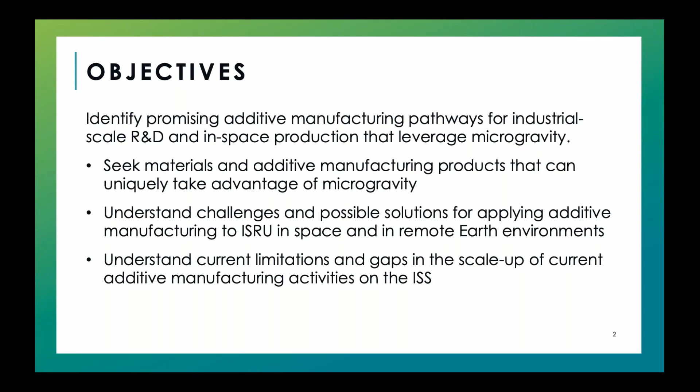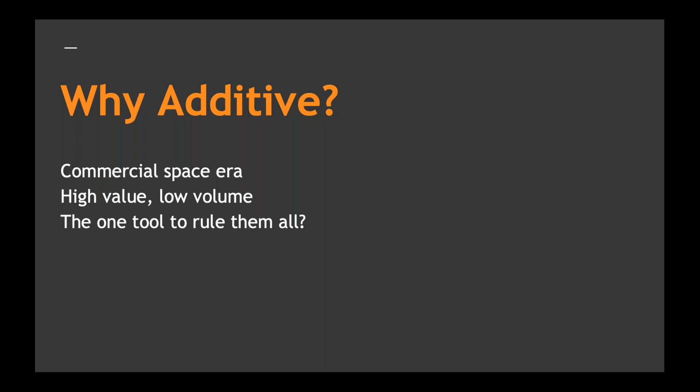Now, what are the trends, or rather, where can we observe trends in the different sectors of the space industry? At this point, it's important to remember we're talking about 7 different technologies. Additive manufacturing, or industrial 3D printing, is an umbrella term, and ASTM has those 7 categories of additive technologies which span metals, polymers, ceramics, and biomaterials. Utilizing those types of materials, you've got a range of technologies from FDM, SLS, directed energy deposition, and there's quite a lot there. So we mustn't confuse this as just a monolithic technology. Often when I talk about additive, I like to talk about the trifecta of additive manufacturing: materials, machines, and software.

So we're going to look at how the trends are in operation across these areas within satellite manufacturing, ground support equipment manufacturing, launch industry, and off-Earth and exploration, grouped together there. We're going to draw upon a review of the state of the art and some of the more interesting articles I've picked out from our reporting over the past 12 months. I've got 10 examples that I'd like to go through with you to really try to bring this to life a little bit.

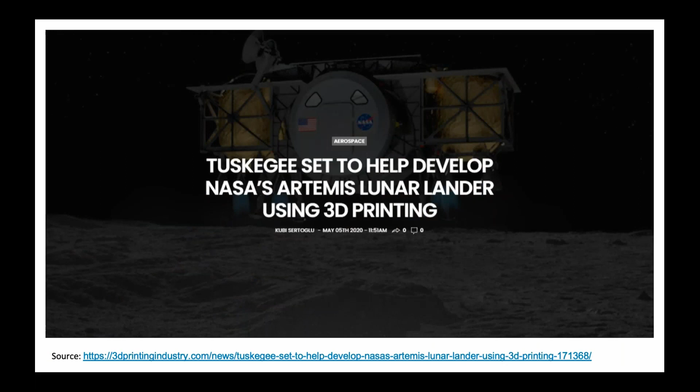So we touched upon the ambitious Artemis program with astronauts returning to the surface of the moon for the first time since 1972. Involved in this project, there are many different partners, and NASA, I believe, have commissioned 3 private aerospace companies to design and manufacture human landing systems, or HLS, for this mission.

So SpaceX, Blue Origin, and Dynetics are involved in this, and they've begun working on conceptualizing the human carriers which the astronauts will use to land on and take off from the moon. And within the Dynetics team, there are a number of smaller subcontractors that will play specific but very crucial roles in the development of Dynetics' HLS, one of which is Tuskegee.

And as the project's only university-based team of academics, their engineering researchers will oversee the testing and evaluation of additively manufactured parts for the lunar lander. So tying this back to the introduction, this is clearly an example of that trend where you've got something which is pretty low volume - only one lunar lander will be going up. They may make a few more as prototypes, but certainly not high volume. So this is again a forte of additive, and a key trend we're seeing is the application for this particular reason.

Okay, let's look at another trend.

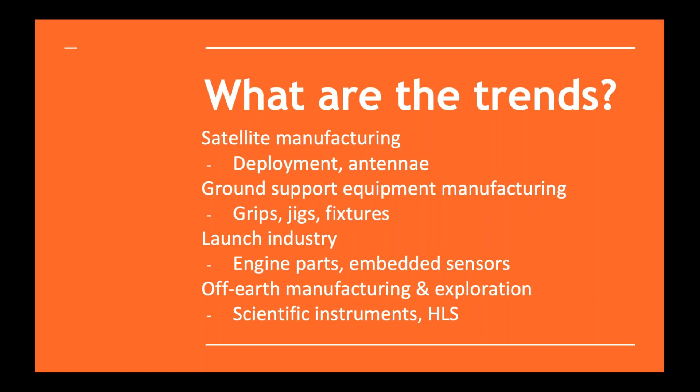Hi, thanks, Ryan. Appreciate that introduction. So today I'm going to give a brief overview that looks holistically at where we're at in our journey of the evolution of additive manufacturing technology from the perspective of applications and the broader domestic supply chain in the United States. Next slide, please.

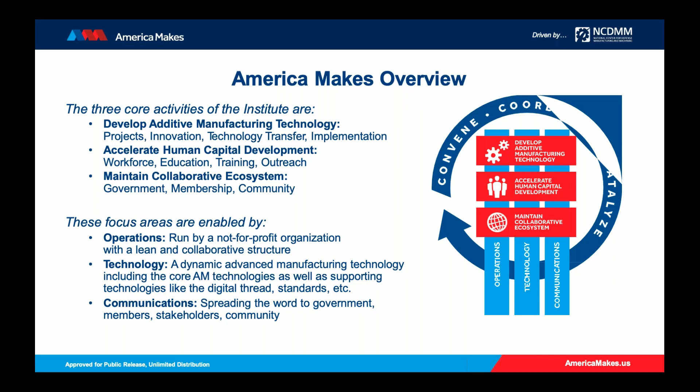So to provide some introduction to really what is America Makes, what is the Institute, the role that we play, we bring together teams comprised of various organizations from academia, industry, government, large and small medium enterprise, in order to address the needs of the supply chain in terms of accelerating maturation of additive technologies, identifying needs in terms of things to get the job done from day to day operations of various organizations, as well as how to transition our understanding of technologies or concepts to get them into a state of standardization and ready for use in day-to-day production. And that's not only done through strategic research, but also through events that we host where we bring together folks for networking, or communication instruments that we use, such as webinars, scheduled events, or communications throughout the membership. Next slide. So I mentioned we have a variety of partners.

So there's been quite a bit in the aerospace and defense sector, but that being said, we're not necessarily focused solely on that application space, and I'll show some examples here in a bit. Currently, we have over about 225 members, and the Institute is driven by a nonprofit organization called the National Center for Defense Manufacturing and Machining, based close to Johnstown, Pennsylvania.

In terms of additive manufacturing, I think there's quite a bit of awareness in the community today, as was talked about in the previous discussion. And it's really evolving. Clearly, from the example shared, quite a bit has happened in the last 10 years of the additive manufacturing technology space.

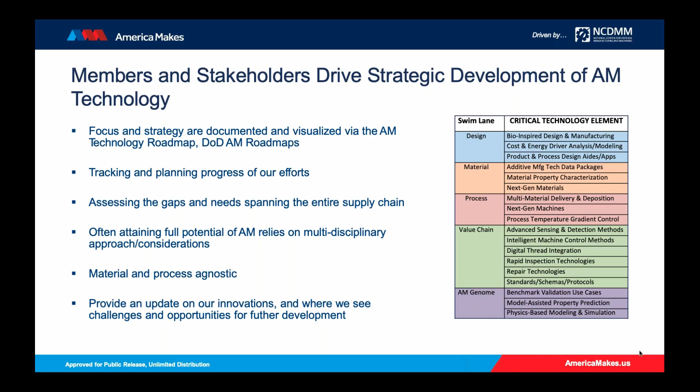Starting with design, we really started in the early times of the Institute's origin, doing a lot of exploration of the capability to realize the minimum feature size or the geometric dimensioning and tolerancing of various additive manufacturing processes.

Our approach is really process or material agnostic, and it takes quite a bit of effort to really understand, with all the opportunities in terms of the material space as well as the process and equipment space, what we can really derive in the products we intend to produce in terms of their geometry.

Our path then went into really understanding structural performance—not only what we can expect from additive structures, but also how to tailor the geometry of those structures to derive improvements in performance. One case in point is topological optimization approaches that leverage design tools in order to tune the resonance frequency of a structure.

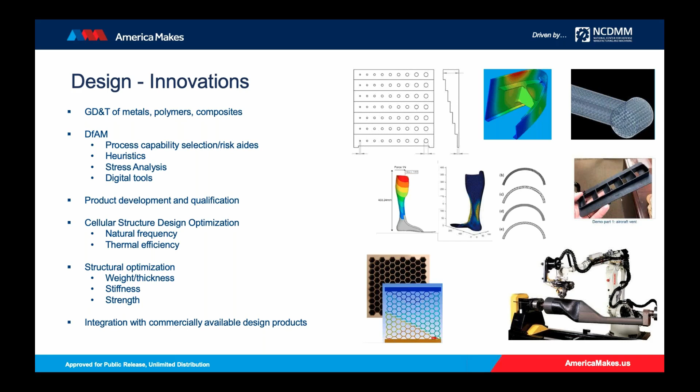In addition to understanding how we can assess and predict the performance of cellular structures, or even lightweighting of internal tooling or support structures for composite layups, we've also explored how we can tailor those geometries to improve stiffness and increase yield for various composite manufacturing processes. We've also seen a number of opportunities where the success of these programs has transitioned into commercially available products, which is a great thing to mention.

Next slide, please. So where are we going from here?

I mentioned quite a bit of success in the prior slide, but there's still quite a bit we need to understand in terms of additively manufactured products and their behavior in more extreme environments, where factors like fatigue, creep, or how materials or multi-material structures behave under a high heat flux condition come into play. Those are captured by the images on the right-hand side, where I show the optical mounts and the combustor component.

To go along with a lot of these methods being developed and the assessment of these structures, there's also a strong need for validation. We continue to strive to better predict and understand the benefits of not only multi-process additively manufactured assemblies, but also multi-material additively manufactured assemblies. There's quite a bit ongoing there in terms of generating relevant and useful use cases and sharing those lessons learned through our contracting vehicle, which is a cooperative agreement.

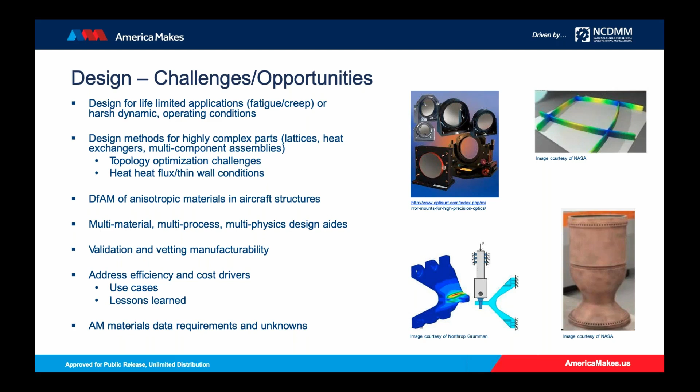There's also a struggle there, a bit of a chicken and egg scenario where the design community could be that much better if we had more pedigreed data. And that brings us into the next point of talking about materials.

Next slide, please. So we've looked quite a bit at a number of aerospace and space application relevant materials: titanium alloys, aluminum alloys, nickel-based super alloys, as well as a variety of polymers. I also mentioned we've looked at carbon reinforced polymers and composites that exhibit longer length scale reinforcement. Our journey to date has really been about process structure property relationships.

The desire there is to get this pedigree data, to substantiate that these materials in this form will meet the necessary functional requirements so that we can mitigate risk once we put these products into an operating environment.

A couple recent examples of ongoing projects include, in the top left, progress made particularly in a program focused on maturation of advanced manufacturing techniques for low-cost sustainment, in terms of printing semi-transparent polymers and looking at their optical transparency.

We've also been doing quite a bit in the last 18 months to understand the behavior of additively manufactured nickel and aluminum alloys in terms of their corrosion properties compared to legacy cast and wrought materials.

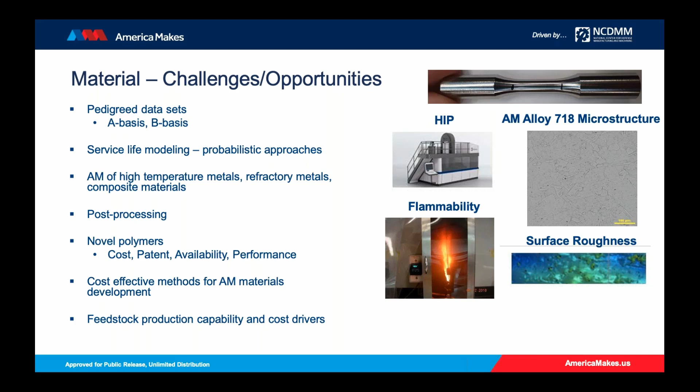Next slide. This next slide is focused on process, and this is an example of how we've been able to leverage a series of programs to address concerns or needs of the community and productivity.

The right-hand side is an example of a program led by our partners at GE Global Research called ALSAM, which is focused on multi-heat source additive manufacturing. That enables additive manufacturing of products at a much larger length scale, as well as leveraging multi-heat sources to increase productivity. That's been a great example of how we can better expand the space within which an operator can exhibit control over the process, and that continues to be an ongoing endeavor today.

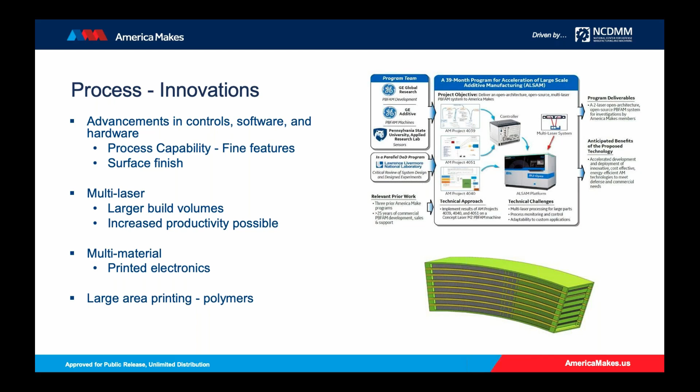There's quite a bit of effort we've done in the production of complex components, pushing the bounds of what additive can do. A great example is the 3D printed heat exchanger on the lower right-hand side, where we were able to produce fairly thin wall structures, on the order of about 5/1000ths of an inch, roughly 125 microns in wall thickness.

From here, the focus is really trying to mainstream these large platforms to be able to calibrate them and assure consistent performance in terms of productivity for a variety of additively manufactured products. There are examples demonstrating the importance of quantifying the behavior of a multi-laser large additive manufacturing platform.

Beyond that, how do we begin to optimize these processes once we introduce additional heat sources? And finally, an interesting question that a lot of us have, and hope to shine greater light on in years to come, is transferring a product from one machine make and model to another, or multiple machine makes and models of the same type, to reduce the barrier to entry or adaptively respond to different needs in terms of demand signals within the supply chain.

Looking at the value chain and understanding the interaction of all the pieces of the AM value chain, a great example of a project we had a couple years ago was exploring the digital thread, realizing how we can account for things like machining stock, or how we intend to fixture an additively manufactured component so that we can derive very tight tolerances if needed through subtractive manufacturing methodologies, documenting those best practices.

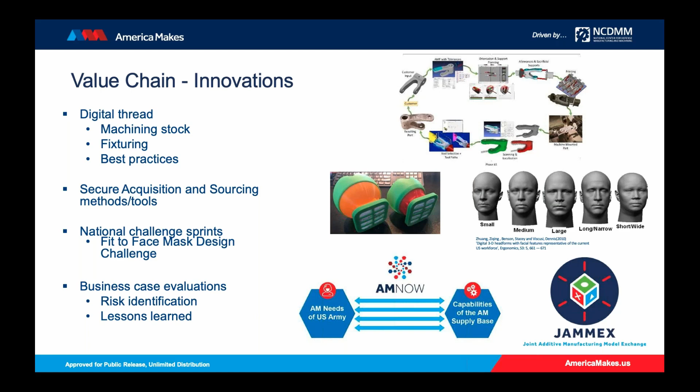Another great example of an ongoing effort is trying to understand how we connect the supply chain in order to share models or source 3D printed components. Examples include a program called AMNOW, as well as a platform that exists to share 3D printed models called JAMMEX.

In terms of next steps, the challenges we see are ensuring the transferability of these data sets so that we don't overburden the community through the upfront investment, but also ensure the transferability of necessary data to ensure product quality, securing these information sharing mechanisms, and addressing the cost drivers in terms of inspection and certification for 3D printed components.

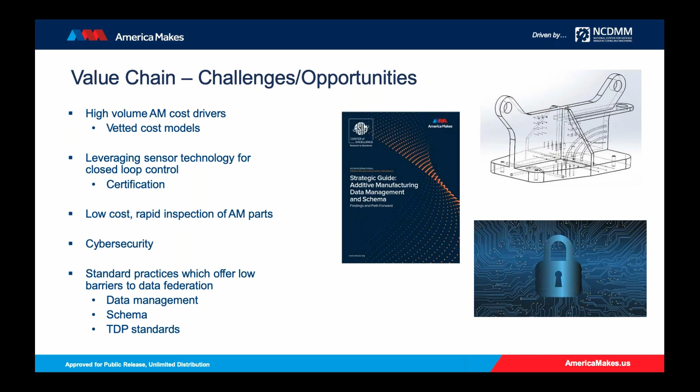In terms of the AM genome space and our understanding of physics-based models or numerical methods for additively manufactured components, a great example is shown on the top right-hand side, where we leveraged a machine learning approach, actually a Bayesian hybrid neural network, to understand the tensile properties of directed energy deposition produced titanium 6 aluminum 4 vanadium alloy for a variety of geometries, through a program that assesses a feature-based qualification method for additively manufactured structures.

We've done a great deal in trying to understand the validity of these approaches through experimental validation, as well as process calibration and metrology.

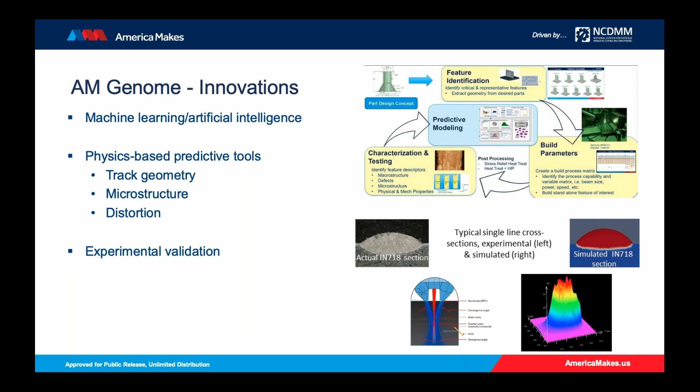From here, where we think there's great opportunity is leveraging machine learning and artificial intelligence approaches to refine our techniques for exploring the solution domains that pertain to additive manufacturing process parameters, either through smart identification of parameters for process development or reducing uncertainty through modeling approaches. There's also a lot of opportunity to leverage modeling approaches for the development of new additive manufacturing materials.

So in that regard, I thank you for your time. I don't think I've gone over too much, but I was trying to make the best use of my time without rushing too fast. I'd be happy to take a couple questions as well, if there's time.

Thank you very much, Brendan. So two quick questions. First, do you collaborate with additive manufacturing partners in Europe, or are you open to, for example, the European Space Agency or ESA spinoffs? So a number of our members collaborate internationally. We've explored opportunities to do that. Now, there are some things pertaining to the way the Institute's funding arrives, where it can create some points of consideration when it comes to directly funding international efforts, but we're always open to considering new ways of collaborating, be it domestically or internationally. Absolutely, please reach out to me. I'd be happy to discuss that further.

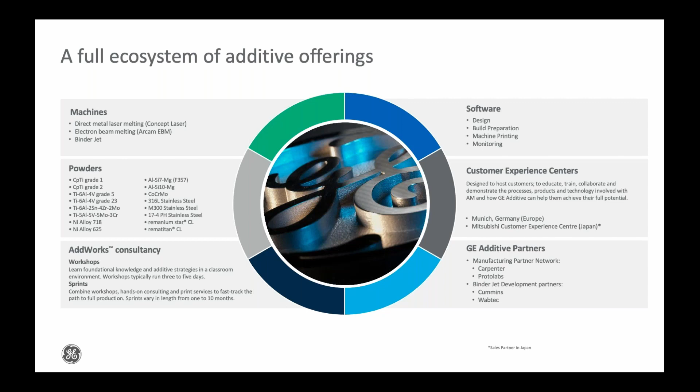Thanks, Chris. You can go to the next slide. So when ATOP approached us on this opportunity, we said, what is GE seeing with the individuals that we've been partnering with in the space sector, and why were they coming to us? So advantages of additive manufacturing for the space community often relate to cost and lead time. You're not having to do a lot of the tooling and whatnot that historically had been needed to make some of the larger and more complex parts. Obviously, part complexity that you can get through DFAM, along with system integration in that same arena. And then, as Brandon had mentioned, there are a lot of alloys that have been matured in these additive machines that are kind of the workhorse alloys in multiple aerospace industries, so it gives a wide breadth of potential applications to look at.

Again, looking at the challenges, I think Brandon had covered a lot of those. One that's near and dear to my heart is the available mechanical data that exists for additive materials. There are just so many different knobs to turn and different post-processing techniques that one may want to consider to optimize for their parts, that it's been a challenge for the industry to come together and agree on what's a common standard.

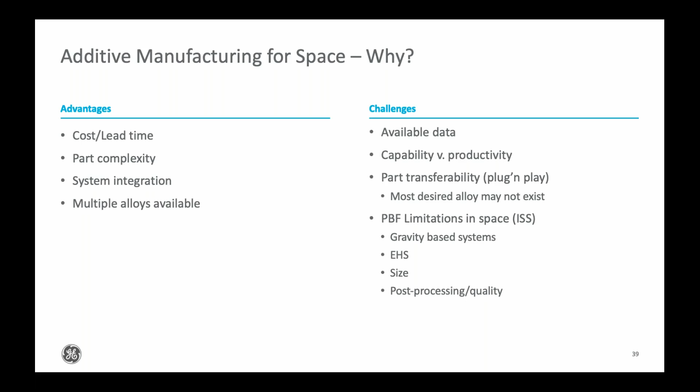And then finally, for the powder bed fusion systems, it poses some challenges if you were to try to do some of that in space - having the gravity fed systems, the EHS concerns with working with powdered metal, and the size of the machines. Certainly the powder bed fusion techniques often require a fair amount of post-processing, whether it's removing the material from the plates themselves or post-heat treatments to achieve the right material properties. We'll show some of that later.

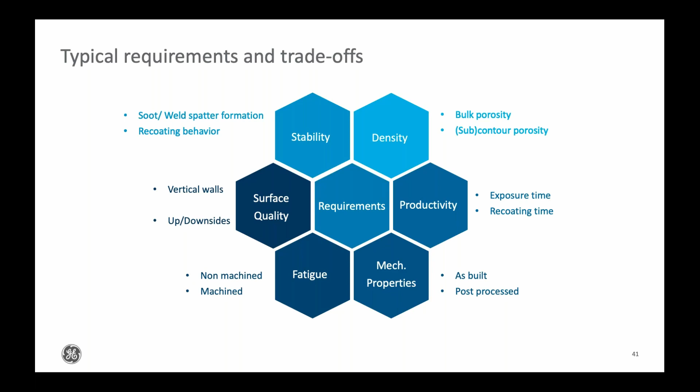So when you look at that, there are many factors that interact and play against one another. As I said, oftentimes if you want a really dense part, that may come at the expense of productivity, and vice versa. And if you look at your surface finish, that's going to be driven by your contour parameter development. So you have two separate parameter developments that end up having to come together - one being your bulk, which establishes your main material capability, and then contour, which influences any kind of surface-driven mechanical capability like fatigue.

If you go to the next slide, I think it's just an animation again showing how all of these interact and need to be considered when you're developing a material and a parameter. So right now, that time frame is fairly significant to get to that final end goal that optimizes all of those for a given application.

The question is, not all applications are created equal. So when you look at what a parameter can provide to you, what are you willing to potentially sacrifice? Can you get away with having it be a little less productive if it means you need the highest quality part, or vice versa? Next slide.

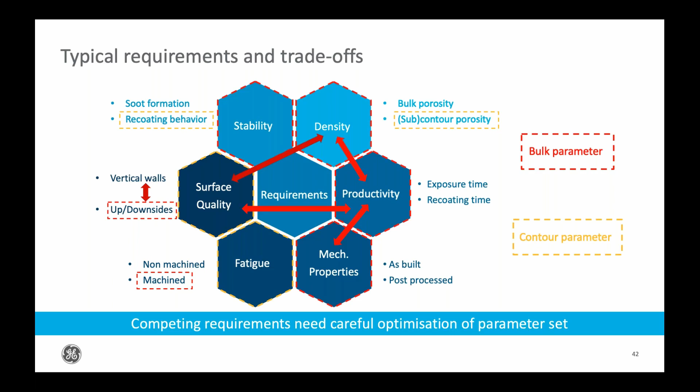So one of the things from a space perspective, we recently partnered with an entity where they did a rocket nozzle demo on our large format Atlas machine. If you've seen this before, the Atlas machine—Chris, maybe you could remind me of the individual dimensions here—but it was a fairly significant part built, and it's done section by section.

The total print time took about 30 days. It was printed in alloy 718. Chris, I think you may know the dimensions of that one off the top of your head.

Anyways, I think it's working now. Is it working? Okay, yeah, we can hear you, sorry.

All right, I apologize. The machine itself is about 1 meter by 1 meter by 300 millimeters high in its current generation, so you're able to make fairly large, monolithic parts. As Amber described, it does print in sections—it's not printing all at one time in one machine, but in sort of sectors.

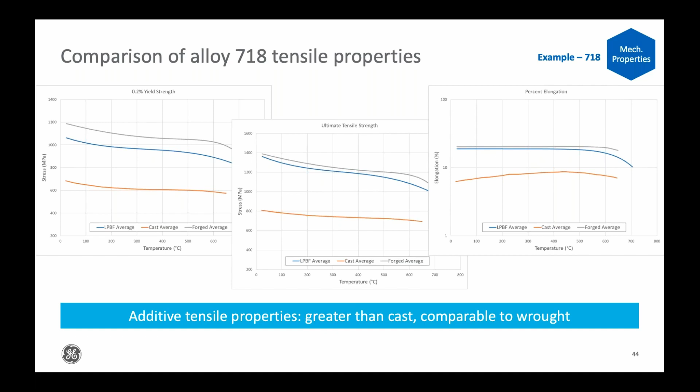Certainly, for example, this type of material—if you had a creep limited application, you may say the tensile looks good, but the creep may not be as good because of the grain size. So you have to think about that and play those games in terms of what property you're trying to optimize for. Next slide.

Showing that development and why we're getting better tensile capability than casting. You start with a very layered-wise process, and for parts built off the Atlas machine, they would follow this relative thermal process map, which started with a stress relief, followed by a HIP to reduce internal porosity for fatigue, and then the typical solution age you'd see in 718.

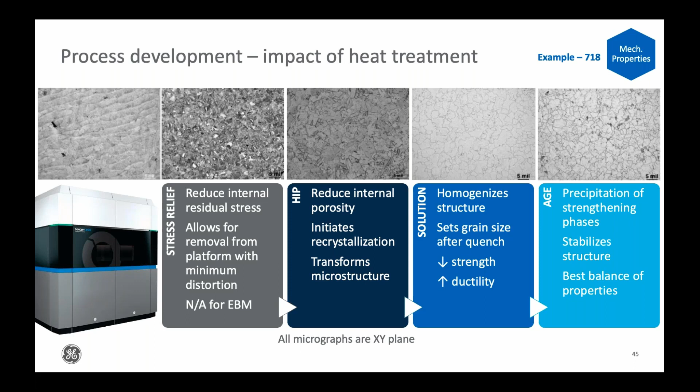So you end up with a grain size on the order of ASTM 4, between 4 and 6, usually more on the 4 side. That's why we're seeing the tensile behavior pop out where it does. Next slide.

On the Atlas system for surface finish, this gives you an idea of where the parameters were and those characteristics. Surface finish for some customers is extremely important, whether for thermal or mechanical reasons. It's something that can be dialed in and will change the productivity and performance of the parameter.

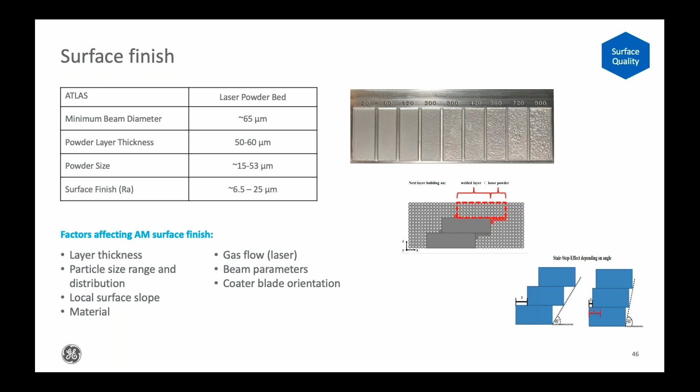Right now, the surface finishes we were seeing on these Atlas prints were somewhere between 6.5 to 25 micrometers, based on the orientation of where the surface was measured, whether on a vertical wall or some sort of angled wall, like a downskin, shown on the bottom right. Next slide.

That's not only unique to the Atlas, but also applies to our X-line machines from GE Additive, or what's coming up with our M-line, and even the smaller M2 system with dual lasers. If one is interested in printing an entire part on the platform and getting productivity, there may be a need to look at that stitching capability.

With having that stitch line, there could be concerns about a line or surface discontinuity that can change fatigue capability. So you have to be careful there.

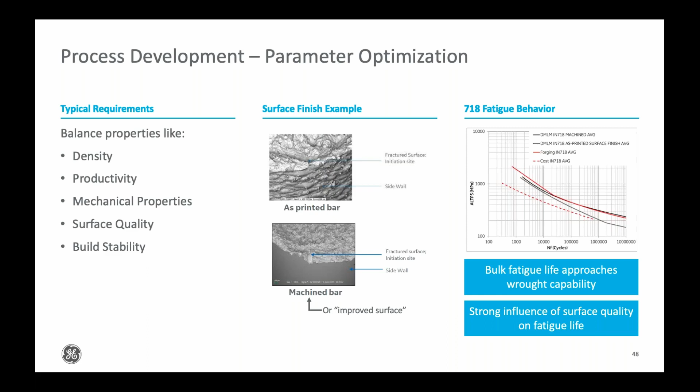This is heavily based off of commercial aerospace, but obviously a lot of these things can be translated into the space industry as well. Last slide.

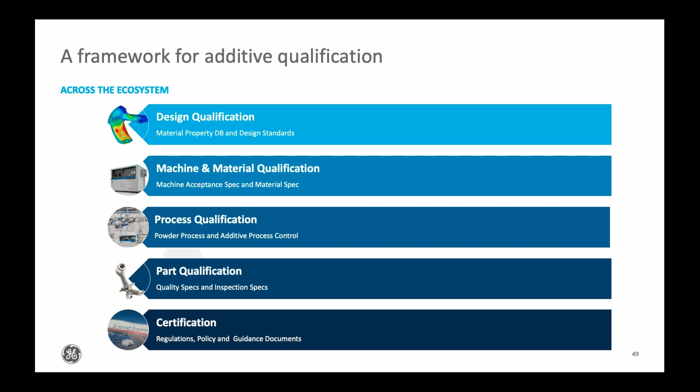In summary, GE Additive has worked with multiple space customers, and typically the interest we've found is more geared towards our larger format options. The parameter and capability of a material tends to be a large driver in the AM business case for those customers, and really understanding the requirements both from a regulatory perspective as well as design is what's going to drive the fundamental conversations and understanding where you need to put your material parameter and/or capability.

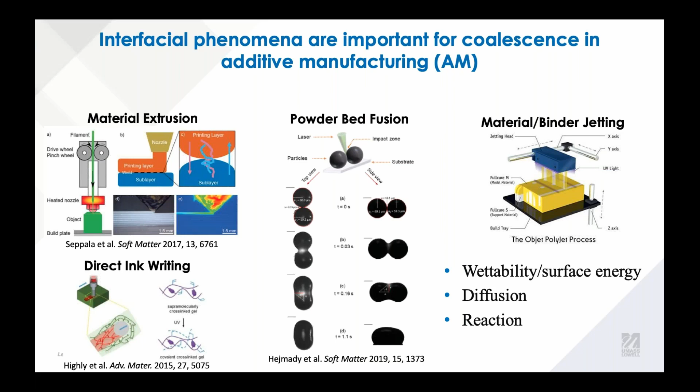So, next slide. Focusing a little bit on wettability, which has been brought up a little bit already. When we're talking about wettability, the classical image of it is that we have a solid substrate, and then there's a liquid droplet that's put on that substrate. If we have good wetting in the system, then the droplet spreads. And if we have poor wetting, then the droplet will bead up.

This is important for a wide range of applications. You can think about coating processes where you want to make sure that you have good wettability. You can also think about superhydrophobic surfaces or self-cleaning surfaces where you want the droplets to bead up and then roll off, cleaning off dirt along the way.

The underlying phenomena that dictates wettability is related to what's happening at the bulk versus what's happening at the surface. On the surface of the material, the atoms are being pulled towards the bulk. This is our classical understanding of this phenomenon, which leads to this excess bond energy on the surface that we describe as our surface free energy.

Wetting in this case is describing the contact here, and for wetting to occur, the surface free energy of the thing that's spreading on the surface needs to be less than that of the substrate. If we go to the next slide.

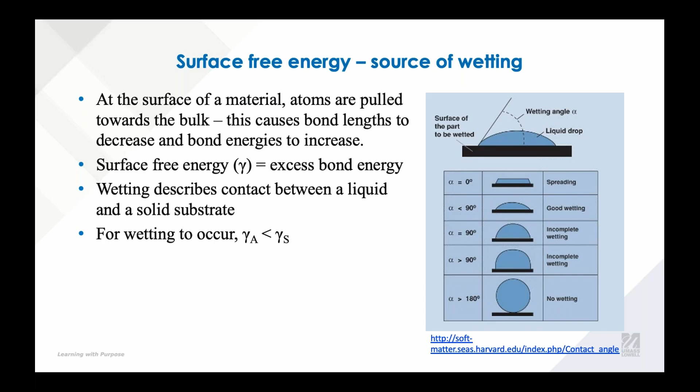Our classical way of characterizing surface free energy is with the sessile drop experiment, where you put a small droplet of a liquid onto a substrate and then measure that contact angle. The Young's equation describes this relationship at the triple point, the intersection of our liquid, gas, and solid phase. This is something that pretty much everyone who's using a contact angle experiment is familiar with. So we can use the contact angles from either known liquids or known solids in order to determine our surface energies.

Next slide. So the next question here is, what happens under microgravity? What happens to contact angles when we don't have the force of gravity?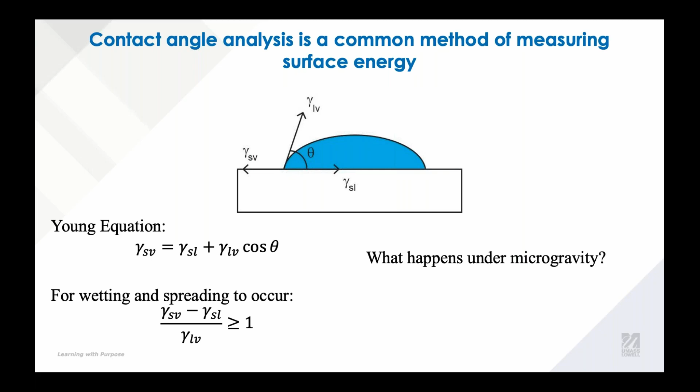Next slide. And the answer is this doesn't change. This isn't because gravity isn't important for wettability—it is—but it's because our traditional way of thinking about this contact angle measurement neglects gravity, which is why, if we're measuring contact angles and we want reliable measurements, we need to use really small volumes. Typically here we're neglecting gravity, and gravity doesn't change our surface energy, but it will change wettability.

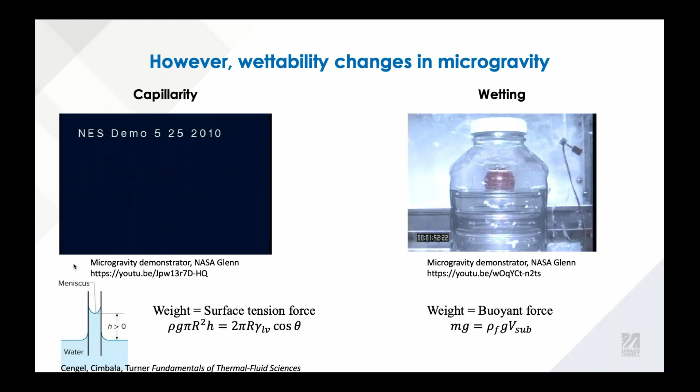So if you go to the next slide. Here I have two videos, hopefully they'll work. They're both drop tower experiments. If you play the video, maybe it'll work. What's going to happen, I hope, is that you'll see a capillary tube, and what happens when it goes through a drop tower and experiences a lower gravitational force. In the capillary tube, there was this large rise in height.

Typically, when we do a capillary tube experiment, we put a capillary—a small diameter tube—into a liquid, and if it's a wetting fluid, then the height rises; if it's non-wetting, then the height drops. What's happening here is we're having this force balance between the weight of the fluid and the surface tension forces.

So when gravity on the left side becomes really small, H needs to increase in order to balance out that surface tension force, because the surface tension force isn't changing here. On the other side, we're looking at wetting. Typically in a hydrostatic problem, we have weight balancing out the buoyant force, and that's determining how far into the water, in this case a ping pong ball, will sit. But when we have very low gravity, those forces become really small, and the thing that ends up dominating is our surface tension force, our wettability, which normally under Earth's gravity we neglect.

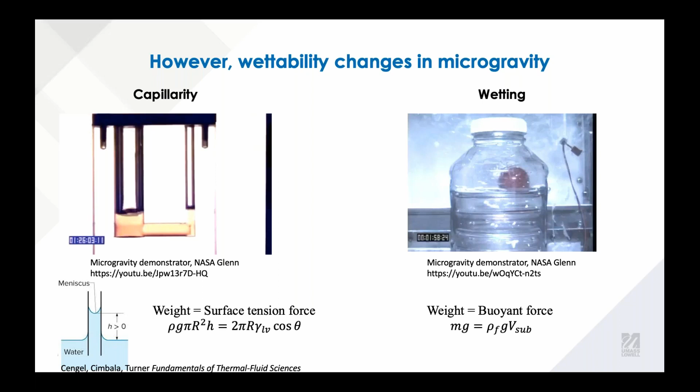What I want to do here is briefly go through four classes of additive manufacturing technologies and start to think about how they'll operate under microgravity, focusing on coalescence.

We'll start with material extrusion, which many of you know. Stratasys has its FDM, the generic name is fused filament fabrication, and then also large scale, so big area additive manufacturing.

In this process, we have a molten polymer that's being extruded through a rastering head, and this polymer cools rapidly and stops flowing. Then we end up printing another layer on top, and the strength in the Z direction evolves through polymer welding. We can think about what's happening at that interface using polymer weld theory.

The first condition for this welding to occur is that we have to have rearrangement and surface approach. If we don't have intimate contact between the two sides, then we don't get any welding. Assuming that we do have this intimate contact, the next step is wetting, where the condition would be that you have surface energies that facilitate wetting of your molten polymer onto the cooled polymer below it.

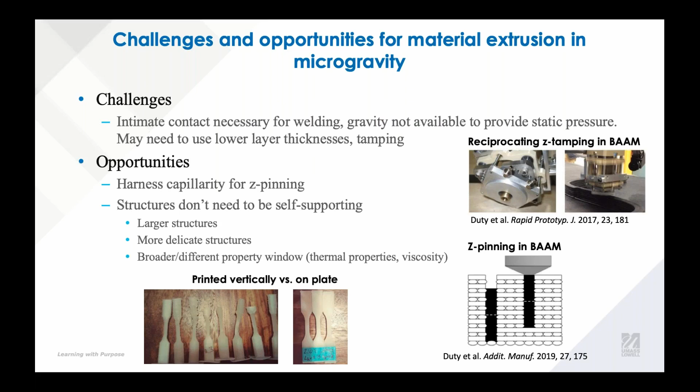Now we'll move on to direct ink writing.

In direct ink writing, the inks being printed are designed to be Bingham fluids. That means below a critical stress, they are solid-like, and above that stress, they'll flow. A classic Bingham fluid would be something like mayonnaise, where in the jar it's not flowing, but you can put a knife through it and then it flows. Related to this issue is that if you have mass to your structure, over time you can exceed that critical stress, and then you can end up with slumping of structures. This is something that's been looked at.

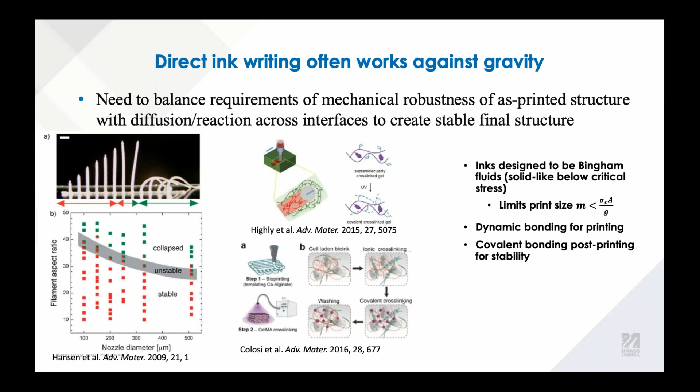However, in microgravity, we don't need to be worried about these structures being self-supporting. So again, there's this broader range. There's been a lot of work coming up with desired rheological properties for these inks under Earth's gravity—you can see an example on the right of the screen. But when we don't need to worry about slumping, we don't need to worry about having rapid recovery of our storage modulus, or having an appropriate ratio of our storage to our loss modulus.

And so that really starts to broaden the range of materials that we could print. Potentially we can print things that currently, on Earth, we need to print and support. So things like PDMS could be printed freestanding.

Another thing I wanted to bring up is an idea to take advantage of microgravity: being able to print foams or other types of structures that have large surface area to volume. There are examples of wet foams that don't drain in microgravity, meaning they have greater stability. You could envision new designs facilitated by the fact that we're not fighting against gravity in microgravity.

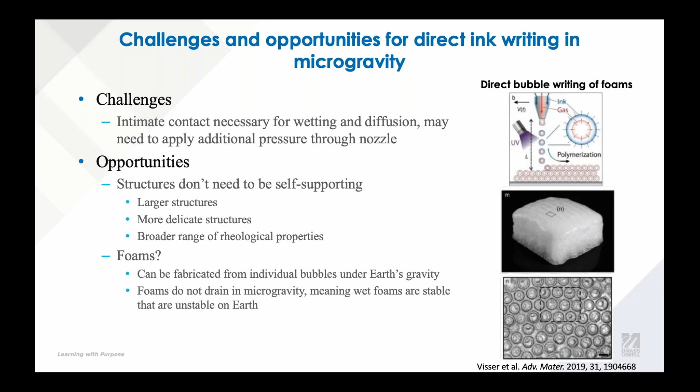All right, and then the third example here would be material or binder jetting.

So here we've got material jetting and binder jetting, and in both cases there is a material that's being jetted. In the material jetting example, the material being jetted is the material you want to print with, and then often it's UV cured, and sometimes there's a support material as well.

In binder jetting, the material that is being jetted is printed into a powder bed, and so that means that with binder jetting we can start to get at printing of green parts for metal or ceramic additive manufacturing.

In both of these cases, we're building off of a lot of the knowledge from inkjet printing, and there's been substantial work in understanding what fluid properties are necessary in order to create a successful ink for an inkjet printer.

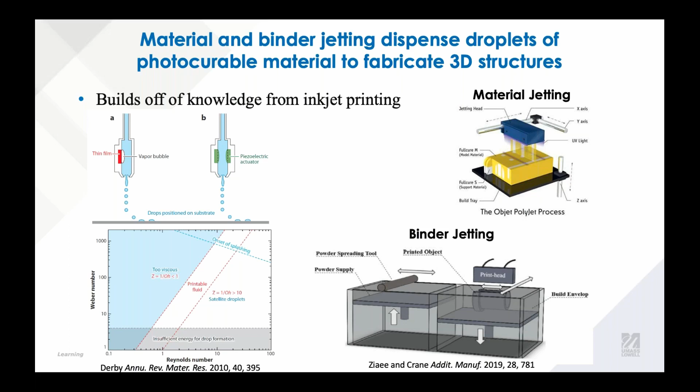So here I want to highlight that for binder jetting, the capillarity is really important. Being able to control this capillarity is really important, because for resolution we need to balance spreading and infiltration.

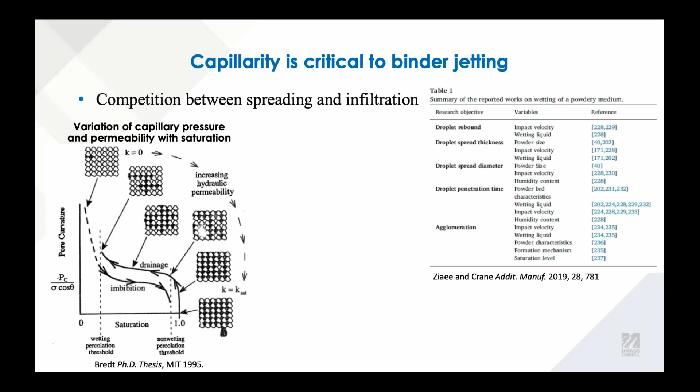So when we think about challenges and opportunities, one is that it's hard to jet in microgravity. There have been some designs, such as this V-shaped printer, that have demonstrated the ability to overcome this, and they've also been able to print into a regolith simulant. So that's something that's also exciting.

And then when we think about opportunities, it's a much broader set of materials that are already printable, and also we can start using regolith as feedstock.

All right, and then I want to finish with powder bed fusion.

So we already know—and here I'm highlighting SLS, focusing on polymers—that things like surface tension and zero shear viscosity are really critical for sintering kinetics, because we have these particles that are trying to coalesce upon application of energy, in this case from a laser.

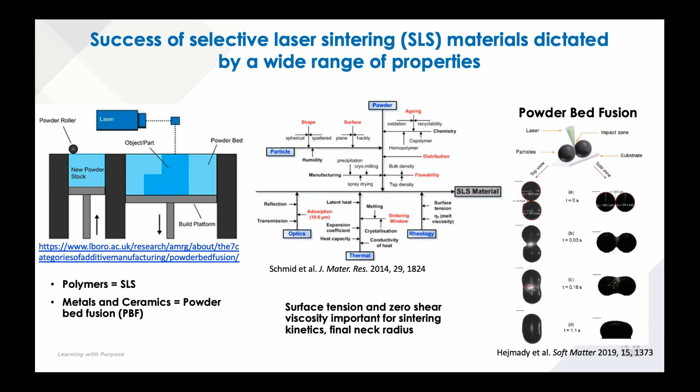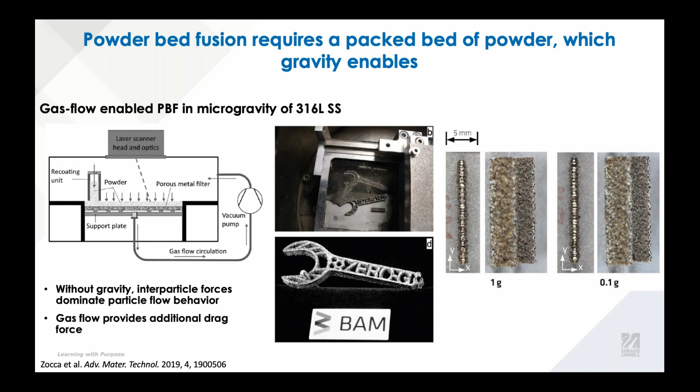Some of the challenges: maintaining a powder bed in microgravity is challenging. And since we need to be efficient in space with mass and volume, having a feedstock that's recyclable is really important. Recyclability of the powders often used for SLS is an ongoing challenge, because the aged powders don't coalesce as well and they don't flow as well. That being said, for powder bed fusion, there is this ability potentially to use regolith as a feedstock, which has been demonstrated.

So I just want to conclude with: surface energy isn't affected by gravitational forces, but typically we think about things like wettability and capillarity being balanced by gravitational forces, and so we need to keep those in mind for additive manufacturing in microgravity. So with that, I will take any questions. I know I went a little bit over, sorry about that.

Question: Are there some additive manufacturing processes that are clearly off limits in a microgravity environment? Oh, I don't know. Before looking into this, I probably would have said the powder bed technologies, but people have been able to overcome that. So it would be hard for me to say that nothing, or that something would be truly impossible.

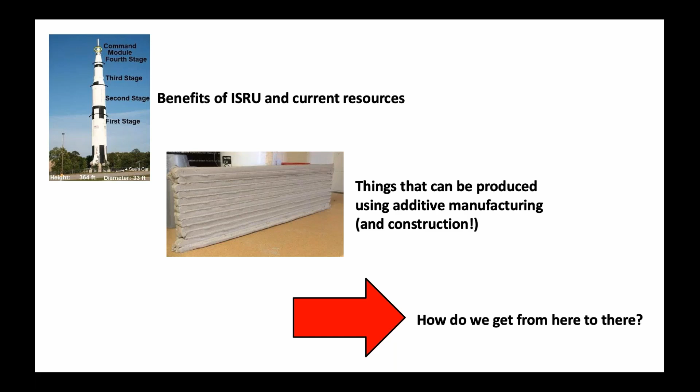For the remainder of the talk, I'll go through a short example of the benefits of ISRU, and then mention the current resources we have available using the Moon and Mars as examples, and things that could be made using additive manufacturing and construction. I'll briefly go into the technology gaps existing in getting from our current capabilities to a sustainable feedstock manufacturing capability off Earth.

So this is my favorite example of why ISRU is necessary, and my colleague Doug Rickman put this example together. This is a picture of the Saturn V rocket at the Space and Rocket Center, and at the base of the rocket is Sue's car. Doug broke down the Saturn V according to how much each part of the rocket weighed. The first and second stages were needed to get off the ground and almost to orbital velocity. The third stage was needed to achieve orbital velocity and then continue the voyage to the Moon, and it separated from the remaining parts of the vehicle only about a couple of hours after the translunar burn.

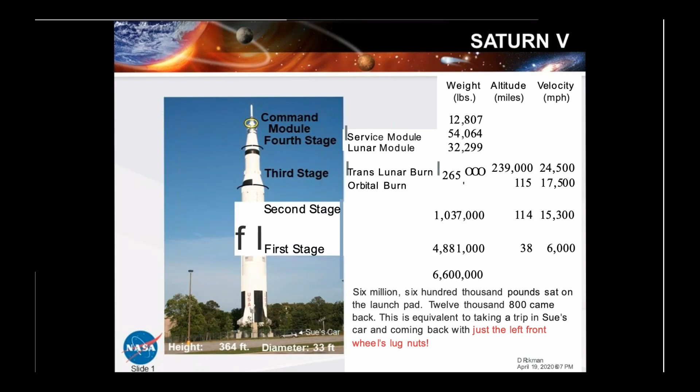So the remaining weight of fuel and structure were sufficient to orbit, land, launch, and travel back to Earth from the Moon. What arrived back on Earth was the command module, circled in yellow in the picture. If you equate the Saturn V rocket to the weight of the car, it would be like traveling to the Moon and returning with the car's left front wheel lug nuts. So much fuel is expended just launching things from Earth, and that's why in situ resource utilization is the only economical way to enable a sustainable human presence off Earth.

Primary components of the regolith are silicate minerals such as feldspar, pyroxene, and olivine. The chemistry of the bulk regolith and the minerals themselves are expressed as metal oxides. Now, this doesn't mean that the surface is composed of metal oxides that can easily be separated via physical means. It means the vast majority of these oxides, quote unquote, are bound up in mineral structures, so the different elements that make up these minerals have to be separated using some kind of chemical means, which can be pretty complex.

Alternatively, at least on Mars, you have an atmosphere made of 95% carbon dioxide, which is great for making polymers. But how many people have demonstrated producing polymers from a Mars-like atmosphere in Mars-like temperatures and pressures, or in reduced gravity? Does the technology exist? I hope it does, but is it flight qualified? Is a polymer produced as a vat of goo, or is it fed into a filament making machine and ready to print as soon as it cools? My guess is the former rather than the latter.

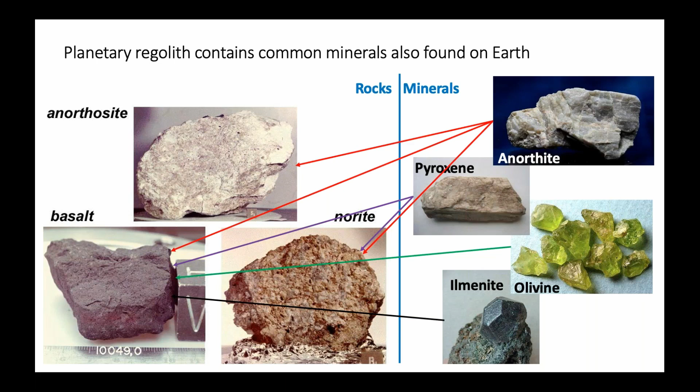And we also have lake sediments, so we know that water and brine was a large part of the modification of the Martian surface in the past. Those elements will be there for us to use in our additive manufacturing feedstock. Next slide, please.

So what does this all have to do with the ISS? The ISS is our example of how humans can live off Earth. It's our test bed for a sustainable environmental control and life support system, and our test bed for finding out what works in constant less-than-Earth-gravity conditions. A lot of the processes we have here on Earth are dependent on Earth gravity, including the way human bodies operate, so we have a lot of work to do.

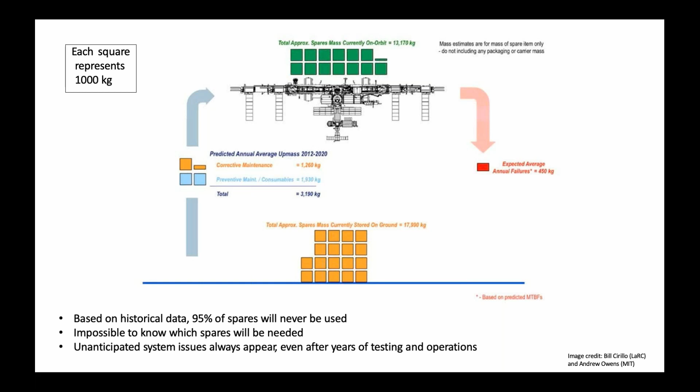If we had the opportunity to manufacture our spare parts on demand using feedstock made from in situ resources, imagine the time and money that would be saved, as well as the small amount of space the feedstock would take up relative to the 13,000 kilograms of spare parts on the station. So if we could produce feedstock from things already on station, wouldn't that be even better?

There's a lot of in situ resources available on the space station. There's the carbon produced daily by the Environmental Control and Life Support System. There's bulky orbital replacement units and other single-use items on the space station, and currently all the packing foam used to insulate payloads from launch loads is taking up space.

If we had a sustainable habitat on the moon, we could take the anorthosite, pyroxene, olivine, and ilmenite, chemically separate them into their constituent elements, and then recombine them into cement for walls, silicon for solar panels, inks for flexible printed electronics, vitamins and oxygen for crew members, and new metal parts.

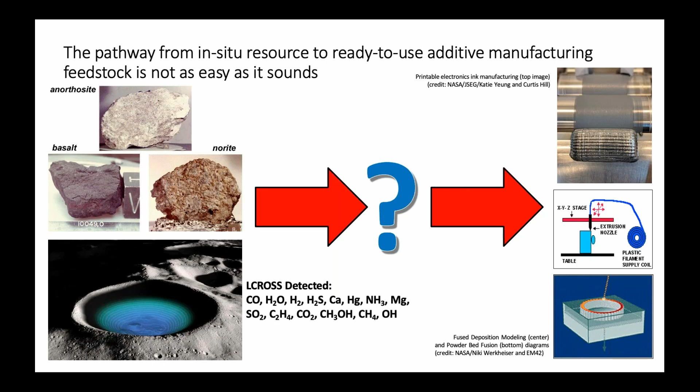Compounding these issues is the site dependence on in-situ resources.

If you take this element map of the moon, the iron concentration is on the left and thorium is on the right. If we build a base in the lunar highlands, we won't have as much iron or titanium as we would in the mare. So what does that mean for manufacturing if it's decided to put a base on the highlands material by the lunar poles, to mine water from the permanently shadowed regions?

Additionally, things like rocks are not readily available on the space station and won't be available for most interplanetary journeys. So if there's a plan to use carbon from an Environmental Control and Life Support System, that means a crew will have to be on planetary surfaces to use that material, and they need to be there long enough to generate that carbon. The same rule applies to anything we want to recycle.

From my perspective, especially if we want to establish a sustainable human presence off Earth, we need to come up with new materials, or adapt old materials for use in reduced or microgravity environments, with special attention paid to the environment of use. If something needs to survive on the lunar surface, it has to deal with thermal swings, radiation, micrometeorite impact, and the electrostatically charged lunar surface. And if these new materials can survive in the lunar environment, they'll most likely survive pretty well on Earth.

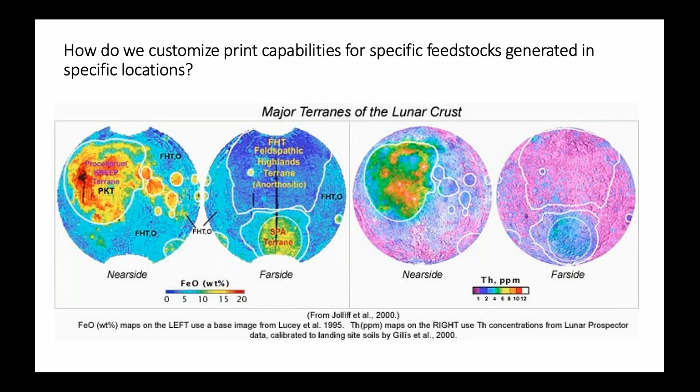So there are definitely benefits to terrestrial applications by doing this in-situ resource utilization research. Next slide, please.

I wanted to finish up by addressing how we might use the ISS as a test bed for new and adapted materials and technologies. For the foreseeable future, humans will be living on planetary bodies with a lower gravitational field than Earth. Because both the Moon and Mars have gravitational fields that lie between Earth and the ISS, they provide bounds that allow us to predict more precisely the effects of gravity that would be seen on the Moon and Mars.

We can fly materials on the Materials ISS experiment, the MISSE payloads, to get an idea of how materials handle thermal swings and a portion of radiation in space. Interior ISS experiments can allow materials to cool without convection and also tell us the degree of settling observed in printed composite materials, and how difficult it is to print with those composite materials.

So my question to the audience is, what ISRU-based material or process would you study and why? Thank you for your attention. I hope to learn your answers during the ISRU breakout session in a little bit.

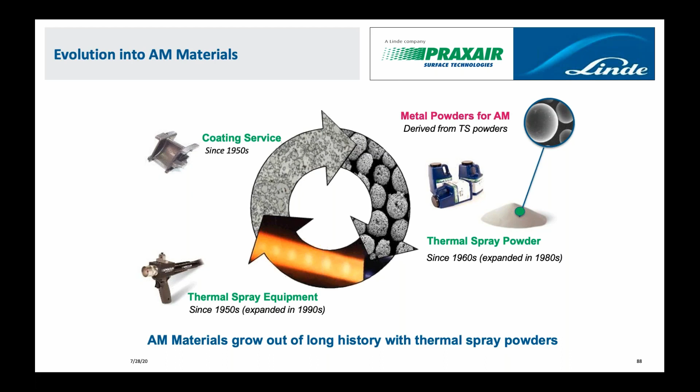Before we jump into the materials, these coating processes were used in the 60s primarily for wear components to increase life. Then as aircraft engine temperatures got hotter, superalloys were developed and needed additional oxidation and corrosion protection. At the bottom of the graph, M stands for a metal, be it iron, nickel, or cobalt, primarily nickel or cobalt these days. We have various ways of modifying the surface to add that alloy.

As engine temperatures continued to increase, they needed further protection, in the 80s and 90s, with something we call TBCs, or thermal barrier coatings. All these micrographs on top are primarily yttrium stabilized zirconia, but using different processes and means to put these down to make either a porous, dense, or dense vertically cracked coating for strain tolerance.

The newer state-of-the-art would be EBPVD, electron beam physical vapor deposition. Again, you go from a horizontal splat structure to a vertical one, which gives you some strain tolerance, meaning longer life. It doesn't necessarily mean a better thermal barrier, it just means it's there and you can count on it and use it in your design in a more robust manner. And then there are further options.

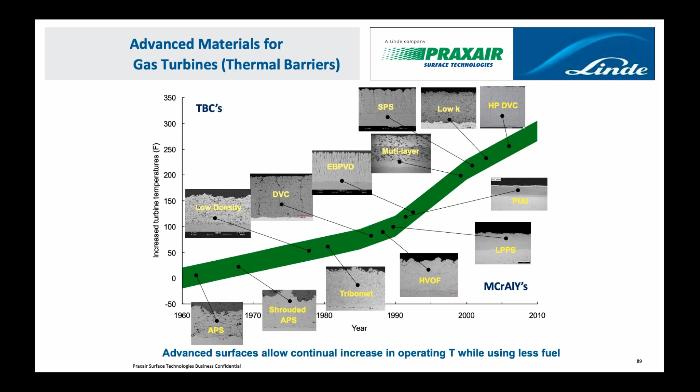Go ahead and go to the next slide. I guess while we're transitioning, I'll say...

Those coatings for high temperature are now finding their way into aerospace applications, because as rockets and engines become potentially reusable, used more than one time, you need to protect some of those metal alloys so you can have a longer life and multiple reuses.

Leveraging that experience making powders, especially metal alloys, we can make most of the nickel and cobalt based superalloys, and iron alloys as well. On Earth, traditionally we'll take refined materials, like elemental nickel or cobalt that's usually 99.9% pure, and put that into a furnace, an induction melt furnace. We do this at high temperature, and since we don't want oxidation, that furnace is inside a vacuum chamber. We heat it under vacuum, then as it becomes molten, we backfill with argon.

Once it's a liquid, we pour or atomize that. The tundish pours the melt, it goes down a runner and feeds a nozzle. You can see the melt in step 2 and pouring it in step 3 on the left there. Step 4 is the atomization process, where in this nozzle we're bringing in high pressure gas in a particular design head to atomize that. On Earth, in gravity, that will form spheres as it falls, and as it cools, we collect it and size it.

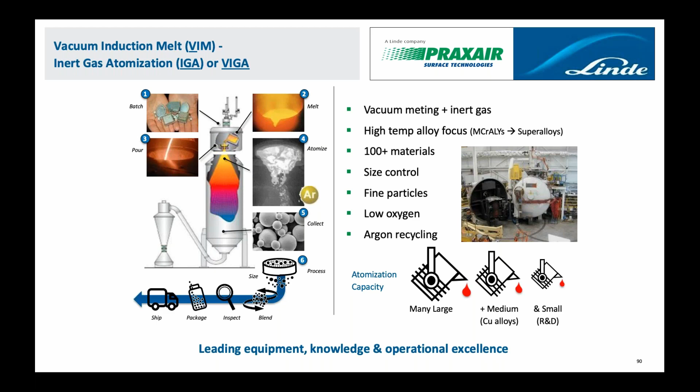As a recap, where we've been, what we're doing now, and where we can go in the future: for a lot of additive manufacturing, they've taken advantage so far of materials that were already being used. That was important in aerospace because these materials have a long history, certain properties, and specifications. There's been a lot of work done to make materials and print parts where the materials and microstructure, the properties, are the same as cast or wrought materials.

People have been very successful. Things like Inconel 718 alloy, that composition is very strong, it prints very well, and can easily be made into powder.

Sometimes other alloys may be a little more difficult. If you think about materials that are difficult to weld, those may not be the best materials to use for additive manufacturing. But sometimes you can get some of the benefits by modifying those chemistries or tweaking them. Some initial things you might do are reduce the boron content or the carbon content, some of the things that might make these brittle or cause segregation or cracks when they solidify.

That's what's being done now. But some materials may need to be modified outside of the standard specifications, which would generate basically new material, because we'll have new structures and they'll have new properties. Also, when you're printing, you don't necessarily get an isotropic structure. You get an anisotropic structure with different grain orientations. And if you're clever in your design and how you orient the part on a build plate, you could potentially take advantage of that.

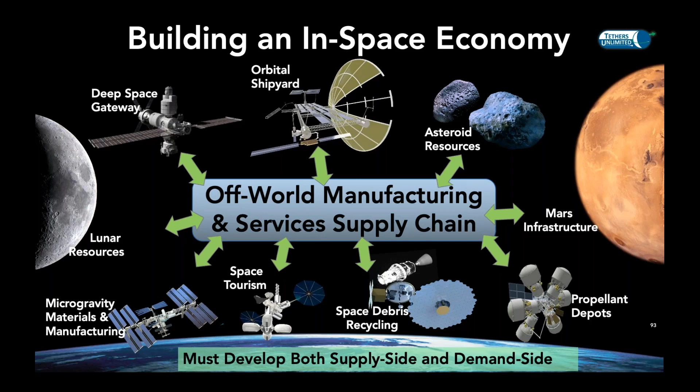So we've been working on a number of the in-space manufacturing and assembly elements to help this economy develop. Next slide. One of the areas we're working on is how do we source materials in space? Jennifer talked about in situ resources for future lunar and Martian exploration. We've been taking an initial step looking at...

...another supply chain for materials for in-space manufacturing, and that is using space trash or even space debris and reprocessing that to make feedstock for in-space manufacturing. So right now we have on the space station a payload, an experimental payload called the Refabricator. The Refabricator combines a plastics recycling system with a 3D printer, and it's designed to enable a demonstration of closed loop manufacturing and recycling on the space station.

We've been working on several related technology projects under NASA SBIR, or Small Business Innovation Research funding. One of them is called Erasmus, where we are looking at in-space manufacturing and sterilization of medical and food-safe items and tools. Another related project is called CRISP, where we're looking at 3D printing of recyclable launch packaging materials, replacing the foams, Ziploc bags, and bubble wraps that are normally used to protect supplies going up to the space station, which become trash that needs to be disposed of. We're looking at replacing that with materials optimized to be reused on orbit, remanufactured into 3D printer filament or other feedstock for in-space manufacturing.

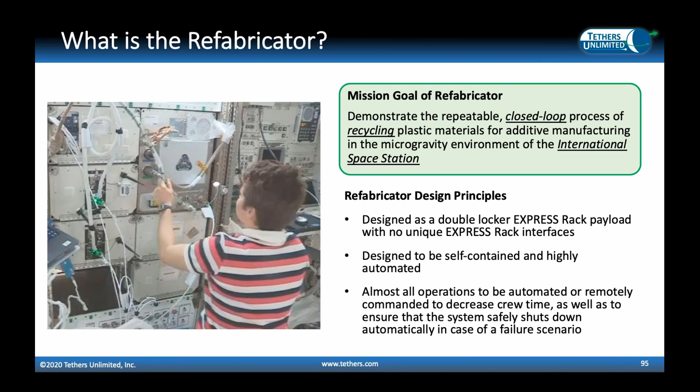Next slide, please. Slide 5.

Under the CRISP SBIR funding, we worked with a handful of different thermoplastic materials: Ultem, which is the baseline material currently being experimented with on the Refabricator, as well as ABS, high density polyethylene, PET, an interesting reversible thermoset material developed by Cornerstone Research Group, and polycarbonate. On the product side, we have been looking at in-space manufacturing and sterilization of medical and food grade end applications.

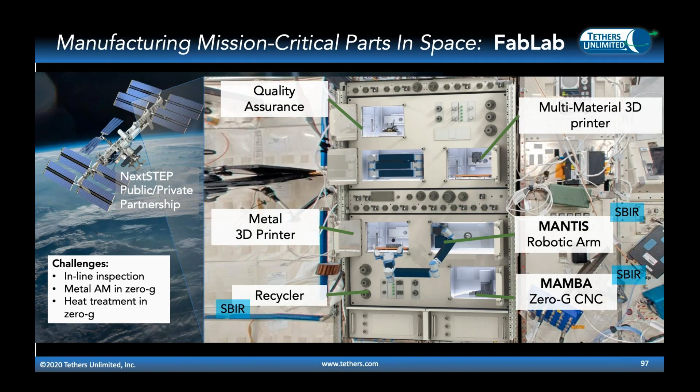One of the key elements of creating capabilities for in situ manufacturing of mission critical parts is integrating robotics into the system. I know this is getting a little away from the focus on additive manufacturing, but it's important to understand the overall capabilities required to support useful in-space manufacturing.

We have been working on a compact robotic arm called Kraken for use both on the space station and on small satellites. Under a NASA SBIR contract, we've been integrating that robotic arm into an express rack payload we call Mantis, intended to enable teleoperation of experiments on the space station. It could support in-space assembly applications, in-space manufacturing, and also tend other additive manufacturing and materials experiments on the space station, reducing the time burden on astronauts to perform these important materials and manufacturing demonstrations.

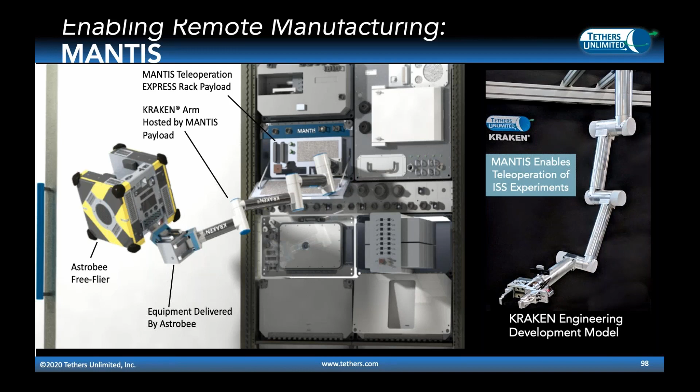On the next slide, slide 8, hopefully this will work, we have a video of the Kraken arm demonstration. Could the operator please click that video, and see if it'll work.

One of the key aspects that people developing experiments for the space station always need to address is the safety of the astronauts. Here we're working on a robotic arm that can extend out into the astronauts' work volume, and we did a lot of work designing this arm to be safe to operate around astronauts. A typical co-working robotic arm, if it runs into a person, will just freeze up, but that's not acceptable on the space station because that would pose an obstruction to the astronauts.

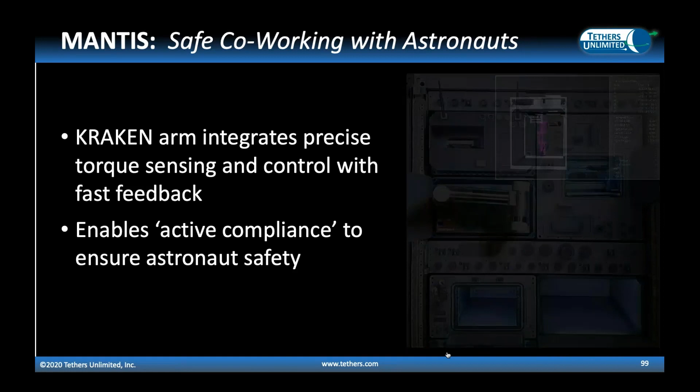So we've done a lot of work integrating very precise torque sensing and control capabilities into the Kraken robotic arm, so that if an astronaut drifts into the way of the arm, it will have active compliance, folding out of the way of the astronaut and not injuring them. Then once the astronaut's out of the way, the arm can go on to completing its activities.

So let's just go through this one more time. The pink plot there shows differences between the commanded position of the arm and what it's actually sensing, so that we can get real-time feedback on what the arm is doing and what it's experiencing.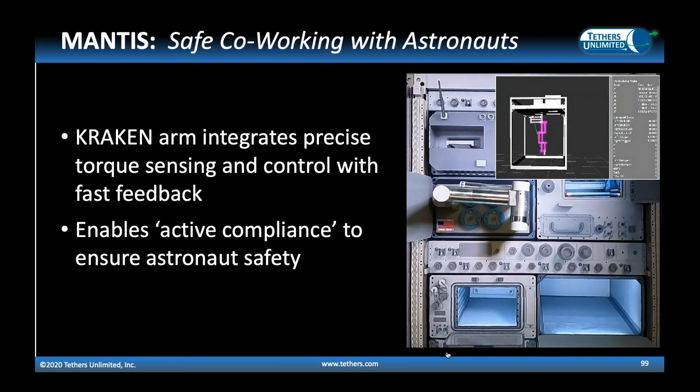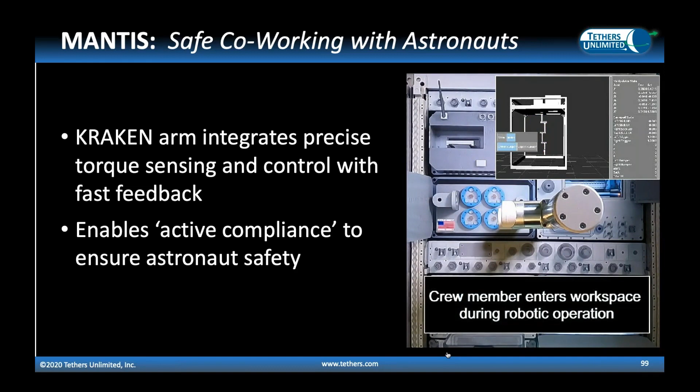This astronaut safety challenge was also a big part of implementing the refabricator. Quite a lot of the work we put into that went into ensuring that the front panel would be within temperature tolerances, that there would be no ergonomic risks to the astronauts, and that it would not generate any kind of particulates or off-gassing that would challenge astronaut safety. So as folks think about creating experiments to go onto the space station, they need to be thinking about safety first. But as we've seen with the refabricator, that can be addressed successfully.

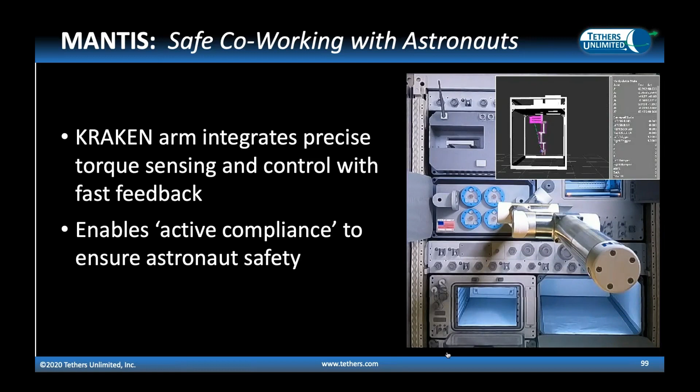Next slide, please. So looking to the future, we are hoping to combine several of these systems to demonstrate both in-space manufacturing of satellite parts and then robotic assembly of them.

What's illustrated here is an experiment we're working towards where our Mamba zero-G CNC milling and recycling system would recycle spare metal parts into antenna segments, and then the Mantis payload could pull those parts out of the mill and assemble them together, doing what's necessary to adjust them so they would serve as a high precision antenna reflector. So these are the kind of things we've been working on and are working towards in the future.

And if there are any questions, I'll be happy to address them.

That was great, Rob. Actually, there were a couple questions, and we'll do one real quick and then go on to the next presentation. You had mentioned something about making the objects and then bringing them back down to Earth and testing them. How do you test for quality? What are the parameters? And then how will this be done ultimately when you can't bring them back down terrestrially to test?

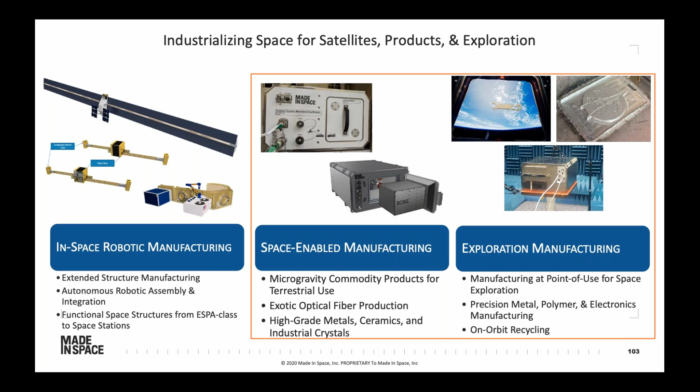and integration to create much larger functional space structures than what traditional deployables are capable of achieving. But for the purposes of this talk today, we're really going to focus on space manufacturing and exploration manufacturing, because that's the focus of our work on the ISS.

I'm very excited, being a former ISS Payloads Office person and former CASIS staff, to talk about the dramatic portfolio of ISS utilization that we have underway. In terms of payloads actually flown and operated on board the ISS, in addition to the zero gravity printer and AMF that I mentioned, we also have flown multiple

demonstration flights, a fiber optic manufacturing facility, as well as the commercial recycling facility that I mentioned. And we currently have in development essentially an entire ISS Express rack's worth of new materials facilities, either being built to fly to the space station over the next 6 to 9 months, or starting development to join these other payloads over the next couple of years.

First up on the next SpaceX flight will be the first ceramic manufacturing facility for the space station. We'll talk about that in a little bit more detail later, as well as complementing what we in NASA lovingly call the triplets: an advanced super alloy metal manufacturing and processing facility, and a first of its kind industrial crystallization facility, where we're taking advantage of the quiescent environment to grow single crystal materials that avoid imperfections or dislocations caused by gravity effects when you try to make those materials on the ground.

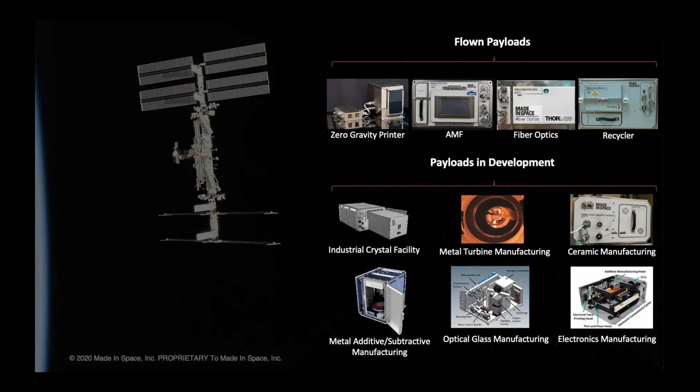Before we dig into some of those details, I think it's important to explain why we're so focused on this demand side of the equation and expanding that portfolio. The reason we've put so much attention onto that part of the equation is because we truly believe that is the next necessary step for space industrialization.

When the company was founded, our founders looked at the state of the industry and said there are lots of different people trying to figure out how to make launch cheaper, more effective, and more accessible. To date, there are over 300 companies working on launch and in-space propulsion. They also looked at satellite production, and there are a lot of well-established incumbents in the form of satellite primes, as well as established incumbents in CubeSats and small sats like Tyvak and Blue Canyon and others. Our founders thought they could make a difference by adding that third leg of the pillar.

If you have cheaper launch and more reliable access to space, and you have cheaper and more effective platforms from which to conduct on-orbit operations, when you add manufacturing and optimization for the microgravity environment and the space environment to that triad, that enables a wide variety of new applications that don't just have added intrinsic value because of being done in space, but become economically viable in ways that weren't possible before.

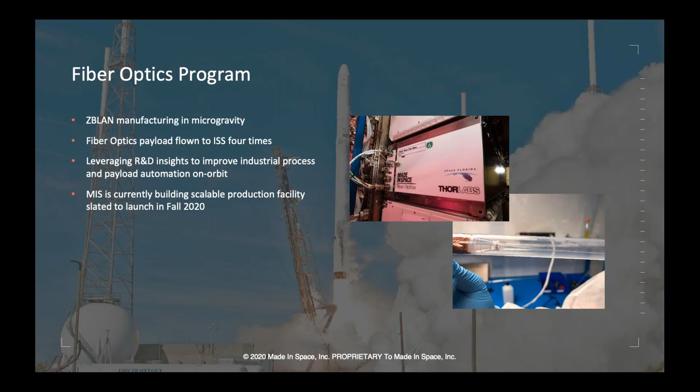And we're building the first production facility right now. Hopefully, as long as everything stays on schedule, we'll be launching that later this year.

Right on its heels, we also have our Advanced Industrial Materials program, looking at what comes next in terms of taking advantage of the microgravity environment to create new products and services that are either value-added to work being done on the ground, or that create new products that can only be made in space. This is in chronological order of when we started these projects, but the ceramic manufacturing machine is actually going to be the first that flies to the station.

It's actually on dock to be integrated onto the vehicle right now. What we've done here is figured out how to use stereolithography in microgravity with pre-ceramic resins provided by Hughes Research Labs to generate highly uniform ceramic parts with much lower numbers of defects as compared with their terrestrial counterparts.

This is important because we're working on this project with small innovative terrestrial businesses like Sierra Turbines, where they need high performance, high RPMs, but the industrial processes that work at very large scale for turbines, like single crystal alloys, and the really big turbines that the Rolls-Royces and GEs of the world make, don't necessarily work at the scale of something that would fit inside of a lunchbox.

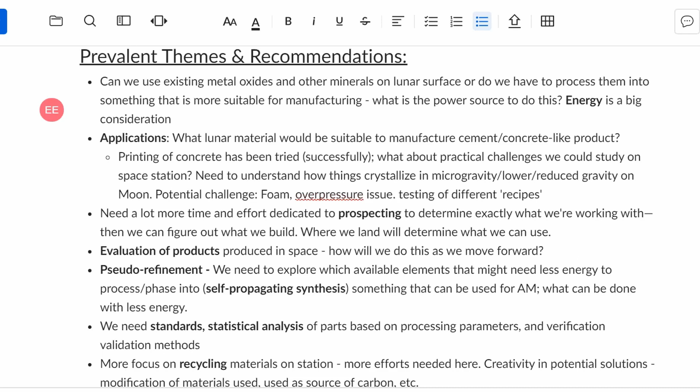All right, can you hear me okay? Yes, yes, I can. I appreciate that.

Thank you. All right, so we had a great discussion over the materials and processes group. Scott Roberts from JPL and David Johnson from Xerox PARC were present, as well as myself—I'm Chris Williams, professor at Virginia Tech—Ryan Reeves from the ISS National Lab, and Amelia Smith took notes. Thanks again to her and to Ryan for helping moderate this and organize the chat room.

So really what we were tasked with was to identify and answer some questions about materials and processes, and we scoped our discussion on board the ISS. We're trying to figure out what materials should be a key focus for additive manufacturing research or production, and how can we leverage the microgravity environment to provide a step change in material performance.

So are there high value materials out there that we could process better in orbit or in microgravity than on Earth? And we were also trying to think about, are there science experiments that we could conduct on board the ISS to better understand our terrestrial processes?

With that in mind, we came up with some answers, specifically thinking about the unique opportunities to characterize and do experiments on thermophysical properties of metals, using the electrostatic levitation furnace to help us create better understanding for our model development of metal processing. Being able to measure surface tension, surface energy, viscosity, density, and undercooling with really high precision at high temperatures of melts would open the doors for us to drive the understanding in our models.

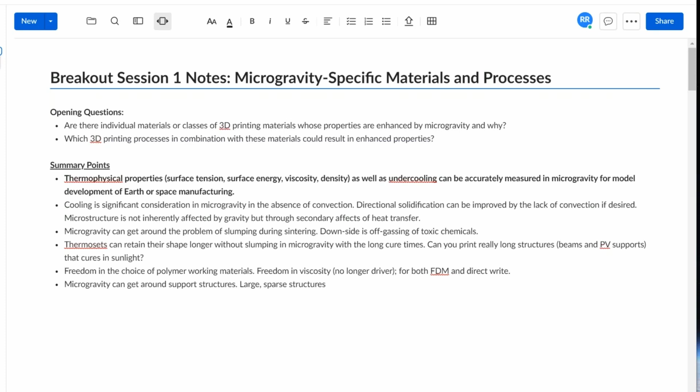Thank you, Chris. Again, another excellent summary in my opinion. Just thinking about all of the report-outs that we've heard, and even going back to the presentations that preceded the breakout sessions, I think I heard a lot of ideas and concepts and thinking, even in the short time we had together, that will help guide exactly where we go on the ISS National Lab and with our partners, and with some of you who will be interested in participating in future research, where we go with additive manufacturing, and what we can do that really makes a difference and takes advantage of microgravity. That's really what we're looking for. So I think we've taken a good step in that direction.

We probably won't want to wait until the next materials workshop to continue this discussion and run it all the way to the ground. So nothing is planned just yet on how we'll actually exploit all this information, but be looking for communications on that over the next few weeks, I'd say.

So what's going to happen from here is that our communication staff, which Emily heads up, along with Amy and Amelia—thank you very much to all three of them for really helping us do a great job taking notes—will work with myself, Ken, Ryan, and others on the National Lab team. We will compile these notes from the breakouts into concise bytes and bits, capturing the most important information. Then we will come back to the session leads and maybe some of the speakers to review all of that. Once we're happy with it, we will put it out as the report from this workshop. So I won't put a date on that, but it will be sooner versus later. Let's just put it that way.